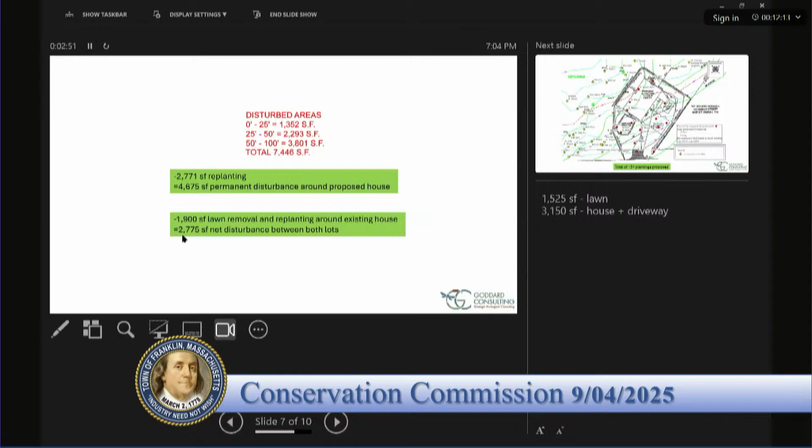We also inventory trees. We are fortunate that we don't have all that many mature trees to take down here. It's about 15. And again, 154 plantings proposed to offset those trees that'll be lost here. This graphic was just to illustrate the general direction of surface runoff here. Relatively flat site, a lot of vegetation for any stormwater runoff to get through. So we really don't think that there is much, if any, concern about runoff reaching the wetlands. And importantly, also infiltrating roof runoff here.

The roof runoff infiltration that we're providing can handle about a 1.4 inch rain event. And this is kind of a simplified calculation. It could hold about 1.4 inches of rain over the entire roof surface, essentially if all that rain fell at once. So in all likelihood, it's a little bit more than that.

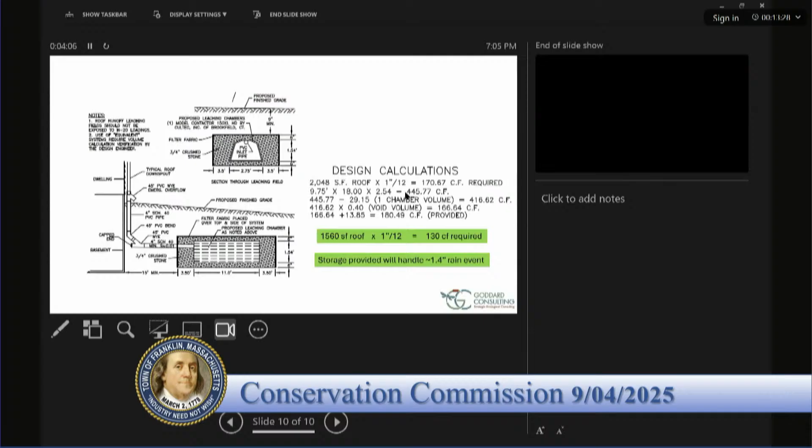I want to bring this back to the avoid, minimize, mitigate calculus that we've been talking about here. We've made some pretty significant changes since the first time that this came to you. We've avoided impacts to the wetland by implementing this retaining wall, which allows us to avoid grading and consequently stretching out into and closer to the wetland itself. We've eliminated the fill and replication scheme. Similarly, that allows us to avoid impacting natural buffer zone for the sake of creating a replication area.

We have minimized our impact, again, by shrinking the footprint of the house. We've relocated the driveway to be able to shrink the limit of work as a whole. And for those impacts that we can't avoid or minimize, we're providing a pretty substantial amount of mitigation here.

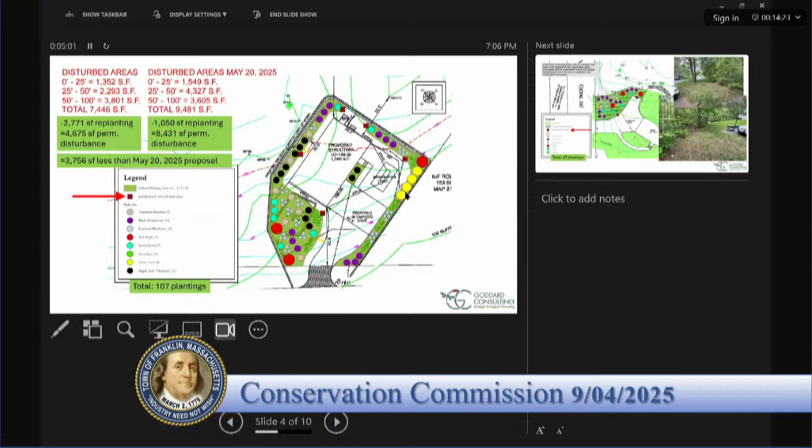Almost 2,800 square feet of planting around the proposed house, all native species, shrubs, trees, herbaceous, as well as about 1,900 square feet of lawn removal for mitigation around the existing house.

Also providing that stormwater management, which again is not required of single-family home projects, but we hope that you will consider all of these components as you're making a decision here, that we have avoided impacts as much as possible. We've minimized impacts where we can, and for everything that we can't avoid or minimize, we've provided a pretty substantial amount of mitigation, really pretty much everything that we could come up with to mitigate for those impacts.

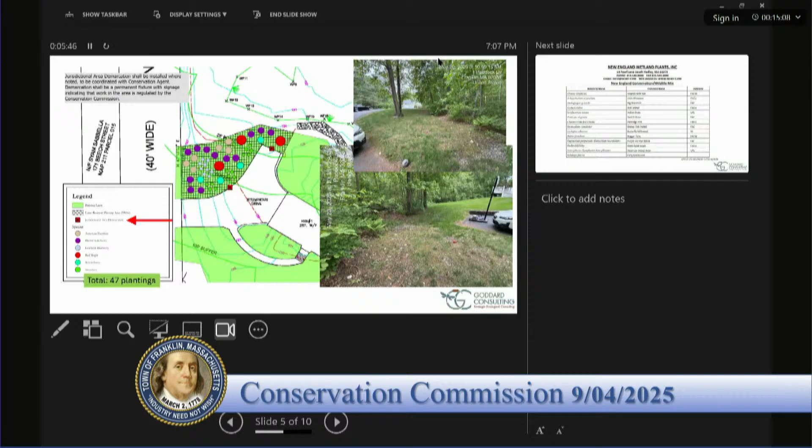So that is my piece here. If Paul or Nabi have anything to add in chambers, I would throw it to them. Thanks, Chris.

He said it all. You said it all. Thank you, Chris. That was great. It was. All right, well, appreciate the overview, Chris.

Any questions from any of the commissioners? Yeah, I do have one through the chair. Chris, on the last meeting, we had talked about putting boundary markers. Is that in the conditions or will be? We did, I did. Okay, fine.

So we can talk about that. And you put it on the plan. So okay, good, thank you. We did show those on our plans here, so they are on paper, and I'm sure that the chair has a condition to that effect as well. Yep. Thank you. Good question.

I appreciate you minimizing the impact of this. Absolutely. Yeah, I'd like to say that I think you've done as much as you can do for this very difficult site to make it work.

Any questions in the audience and chambers here? Comments? Anybody online? We do have a hand up. John Detterman, hello. Good evening.

I have a quick question. Chris, the document indicates that it was revised on August 26th. Forgive me if I missed your note of what was changed between the 14th and the 26th. I didn't see anything. So the only addition was those couple of boundary markers that we just mentioned. Otherwise, footprints, square footages, setbacks, distances, all those types of things are unchanged.

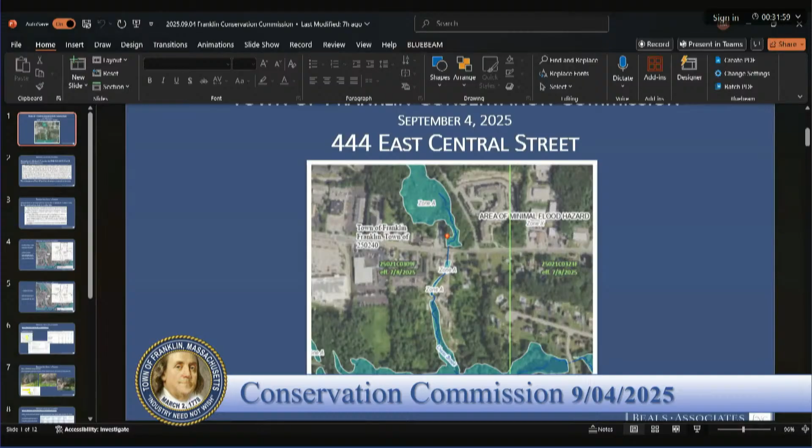As AJ mentioned, we were brought in mainly to look at one very specific and isolated area—the limits of bordering land subject to flooding based on the updated flood maps.

As you know, on July 8th of this year, new flood maps came out in a lot of areas throughout the Commonwealth. In some areas there were really no changes, in others very small changes. In areas such as this, they added additional coverage through there, and I think that's one of the sources of some of the prior meetings and discussions that went on.

The Massachusetts Wetlands Protection Act is very clear about how to define bordering land subject to flooding, and they actually did contemplate what happens in the event you have a site like this. The first way you define it is if they've already done some routing through there—if they've done calculations, if profiles have been established along a stream or around a lake, pond, or other water body—FEMA establishes an AE zone.

Those are zones that have an elevation assigned to them. Sometimes the elevations step up incrementally, especially in a riverine situation; other times they're just flat, stagnant for ponds, lakes, and larger water bodies. In some cases you have an A zone, which is what we have here on this site. That's where FEMA and the National Flood Insurance Program has not gone in and done any flood routing, looked at any calculations, analyzed culverts, blockages, and things like that.

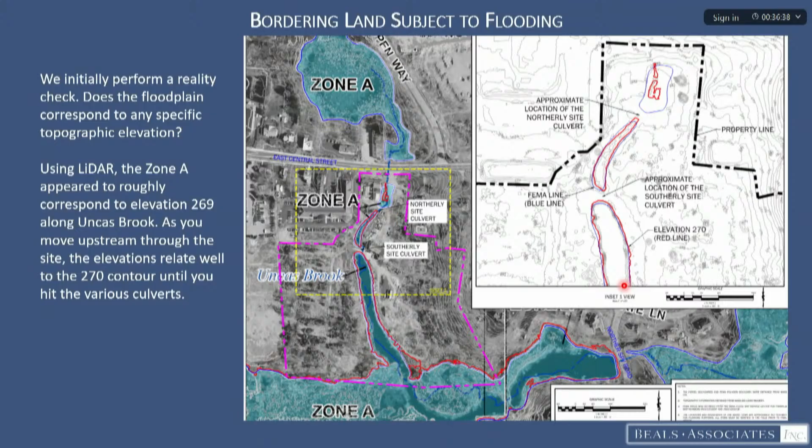It really doesn't correlate well to anything. So that shows us that you can't just rely on overlaying that and calling it a day and then establishing from there. So we have a couple of different ways that we can go about calculating this.

As I noted, we looked at 3 specific points as we went through this analysis. Northern Spy Road, which is really the downstream boundary of what our analysis was, off the project site, down to the lower left. I'll put the highlighter right on it. That laser point is right on it now.

And then there's 2 sets of site culverts that we looked at. We'll call them the southerly site culvert, which is located about here, and then a northerly site culvert, which is here. Those are culverts that are intended to stay, I believe, in the post-development condition.

Are they the same, is that one culvert each at that location? No, actually, in this location, the northern one, there's 2. The southern one, there's a single. There's one, okay.

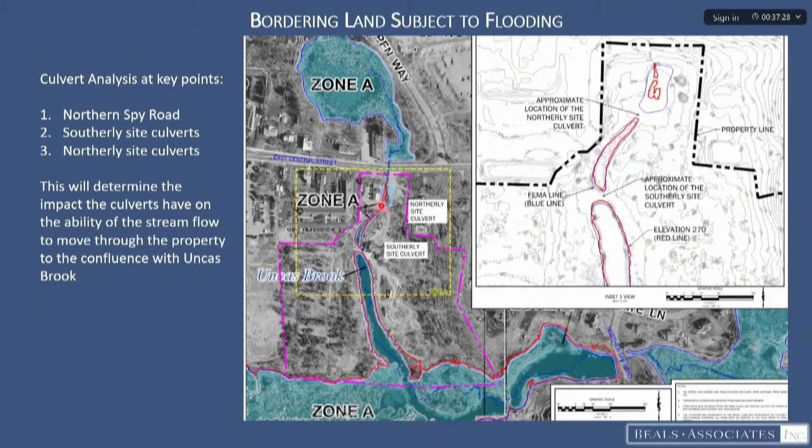So a couple of different ways you can determine this. You can go out and do a lot of field work and study the watershed for a long period of time.

Because a lot of this FEMA work gets done based on USGS programming, national NRCS mapping, and things like that, what we like to do is use a USGS program known as StreamStats. With StreamStats, as long as there's a defined flow path or stream channel, we can pick individual points along that, and it'll run an analysis for us.

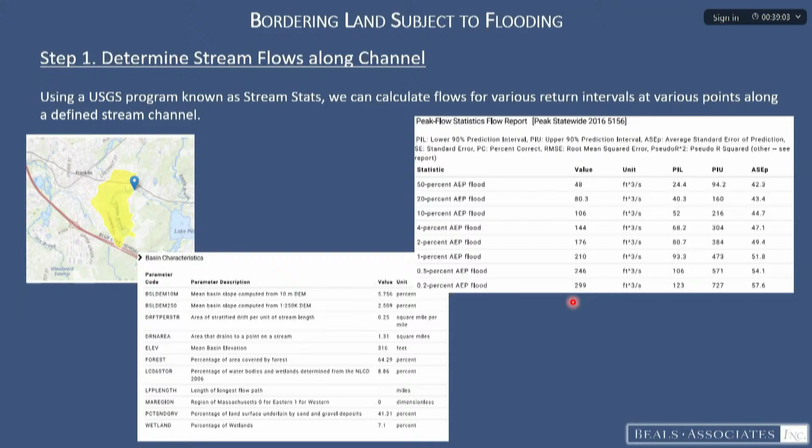And then we have to define our downstream boundary, which, as I said, is down at Northern Spy Road. Where that road crosses over Uncas Brook, on one side of the road, there's water. On the other side of the road, it was dry.

The guys that did the field work for me, I sent them out a week later, and I said, 'Are you sure that's dry?' They told me it was dry. They were in the area on another matter, so I had them take a photograph again. So August 12th, August 19th, August 27th, the downstream side of those culverts is dry. Upstream side, there's water right to the bottom of the culvert. So there's just nothing coming through it.

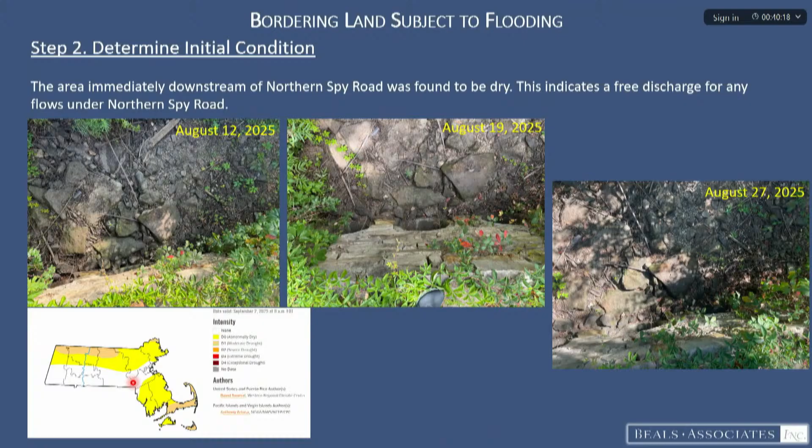The next thing we do is we start to run those flows that we calculated using StreamStats through a culvert analysis program. Federal Highway Administration has developed a program called HY8. It's fairly useful in running multiple storms through a culvert scenario because it can analyze quite a few things. Most importantly, it not only analyzes whether you have a headwater or tailwater control, but it also analyzes what happens if you overtop the road.

And if you put the roadway geometry or the crossing geometry in, it can also tell you the spread, and it takes that into account when it's figuring out its headwater elevations. So using a tailwater condition of free discharge based on the dry flows, we started running those through 2-year all the way up to the 500-year storm through that Northern Spy Road culvert.

271.17. I wanted to highlight that in this case because I know when the applicant's team was here presenting the ANRAD and subsequently issued the ORAD, one of the arguments that they made was that should be looked at as elevation 271 up to that area because of the overtopping on Northern Spy Road. Right. This kind of validates that. This calculation and that assumption vary by 2 inches. I think given the way all these things are done, 2 inches is a pretty good correlation.

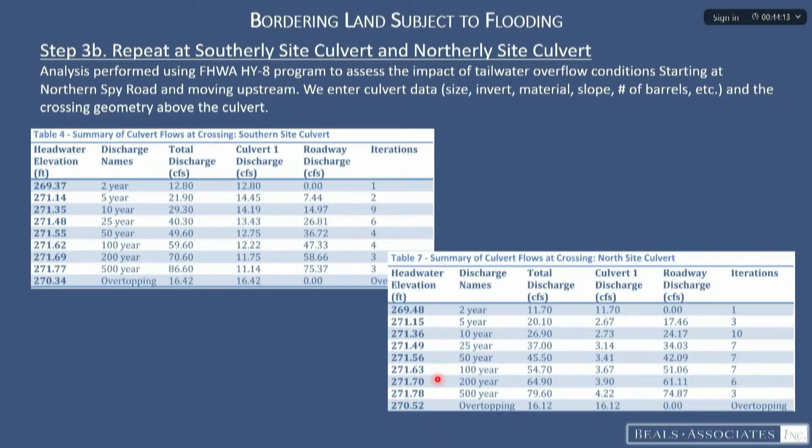Just to circle back to that overtopping where I said it was between the 2 and 5 year storm, 2-year storm, 3.37, 5-year storm, 4.38. So probably somewhere around 4 inches of rainfall in 24 hours is what overtopped that. The other two site culverts had roughly the same result. Somewhere in between that 2 and 5 year storm is where they overtopped as well. If you think about 4 inches of rain in 24 hours, it's a pretty good amount in an area where those culverts have probably been there for quite a while. So it passes the straight face test at this point.

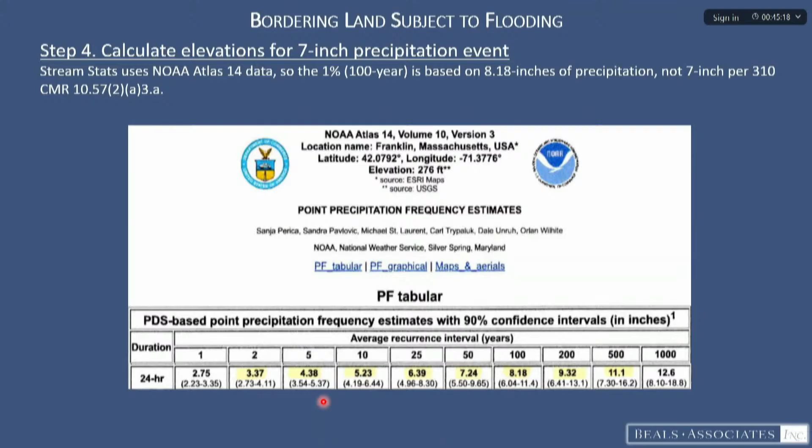So then what we did is we took the NOAA 14 precipitation right here. That's where the 7-inch rainfall comes in between that 25 and the 50. And we just prorated our results to get it to go back to the 7-inch storm. So Northern Spy Road, southerly site culvert, and northerly site culvert, if you look at those 3 points of analysis, we originally said 271.17, 271.62, 271.63. If we prorate it down for a 7-inch rainfall, we end up with 271.02, 271.53, and 271.54 for those 3 points of analysis.

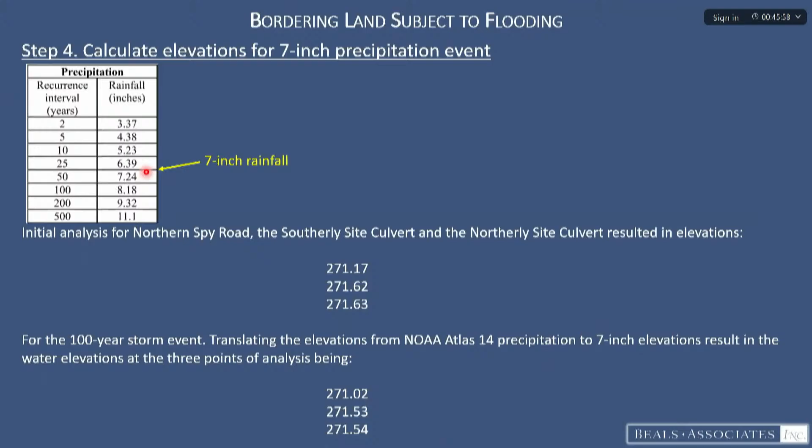So our recommendation back to the applicant and his team was that you call bordering land subject to flooding from the southerly culvert downstream 271.0, like they originally had come up with. In between the southerly and the northerly culvert should be 271.5, and in between the northerly culvert and East Central Street, 271.5 as well. And that's the overview of our analysis and how we got there.

Got it. Okay. Thanks for putting it together in that format. That was helpful, more than reading the report, so thank you. Yeah, if there's any more questions, I'm happy to. It looks a little better in this version than the report. The report's a little dry to read, but. Yeah.

So, you know, do you anticipate any resulting changes in stormwater management based on that? I'll leave that up to the applicant. Yeah, I guess that's not a question for you. Yeah, sorry. Yeah, we brought in Todd specifically to really hone down on identifying the base flood elevation. Got it. He's really versed in that.

So Carlton Quinn is online on Zoom. He's our civil engineer. He can speak to, at a high level, what modifications we're looking at in terms of the new base flood elevation for the BLSF. Carlton, thanks again. And if you can pull up a site plan, Carlton, just so the commission is able to see what area we're talking about, that would be helpful, I think. Yep, 1 second.

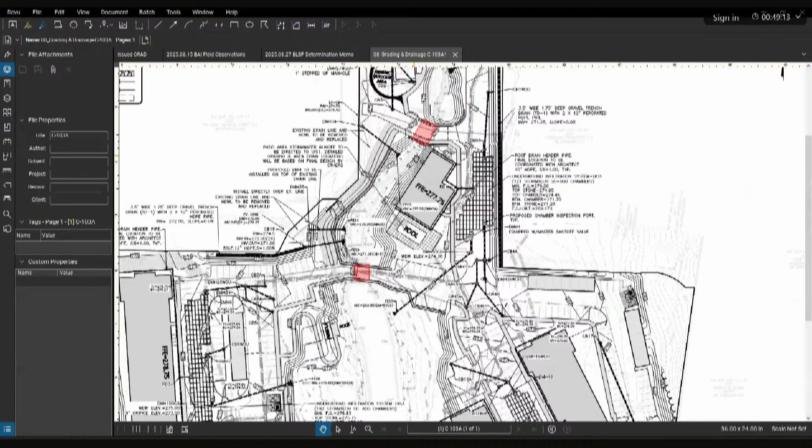Right. The one change to the stormwater design is that there's an existing culvert here that we're proposing to keep in place. And then the ground elevation right here is about 270.5 or so. At that point, the existing ground, we'll be putting in some proposed culverts at that elevation. So when the water ponds up to the floodplain, or the BLSF that Todd had calculated of 271.5, the water's allowed to then pitch into the next low point and not back up the system anymore because we're putting in the stream crossing. And the same thing over here.

So we're putting in some culverts right at about the floodplain elevation to allow the water to discharge as it does today and not have any effects of backing the water up any more than it is. So we'll be trying to match the existing conditions. But outside of those two things, we're not changing any other items on the stormwater.

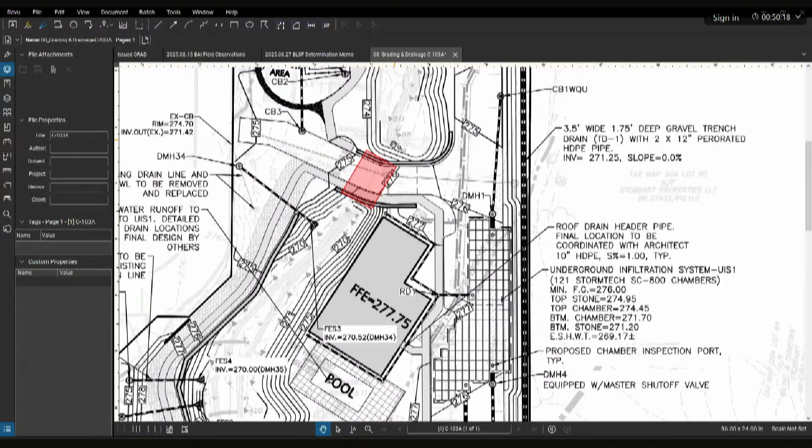So Carl, are you adding culverts to what's already there, or? Yeah, so the existing culvert's down about 268. We're keeping that as is. And then we're over the tops of the road at about 270.5. We'll be adding some culverts at that elevation, a little higher. Oh, I got it. Alongside them? Above them, right? Above them. Yeah. Okay. Do you know how many you're gonna add at each location, or not yet? I've estimated it's either 3 2x4 box culverts or 3 36-inch pipes in that neighborhood. All right. That's just a flow calculation. Got it.

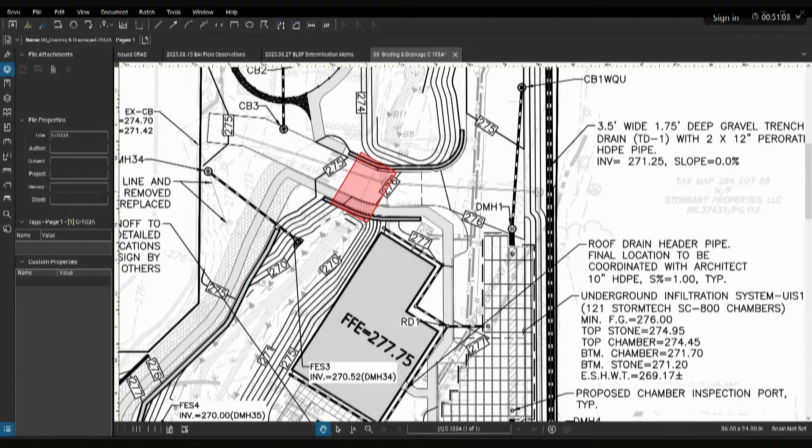You got a question? No, that was my question too, is like, given that we have existing culverts and it seems like you're almost reaching that elevation during the storms, that it would require a need to look at the current design on this, so I think Carlton's got it, he's already tracking that.

Yeah, when we had completed our analysis, Carlton and I had quite a few discussions back and forth. And one of the nice things that pops out of that analysis is not only does it give you those elevations, but it also gives you the amount of flow that's coming over the top in the various areas. So it really kind of makes his job a little bit easier, because now all he's got to do is design a culvert to accommodate that flow. So if we're saying it's 70 CFS that comes over that road, do a culvert that can accommodate 70 CFS, and he won't have any further impacts on that BLSF area.

And Carlton, could you walk the commission through the other modification that we're looking at? I think it's outside of the stormwater culvert design.

Which one is that? Sorry. Where the amenity area is in the north? Oh, yeah, so when we go through the BLSF calcs to match the volumes that are there currently, this area here will likely just become a mitigation area at about the floodplain elevation. So this area of amenities will most likely be removed for a grassed area that will be used for mitigation.

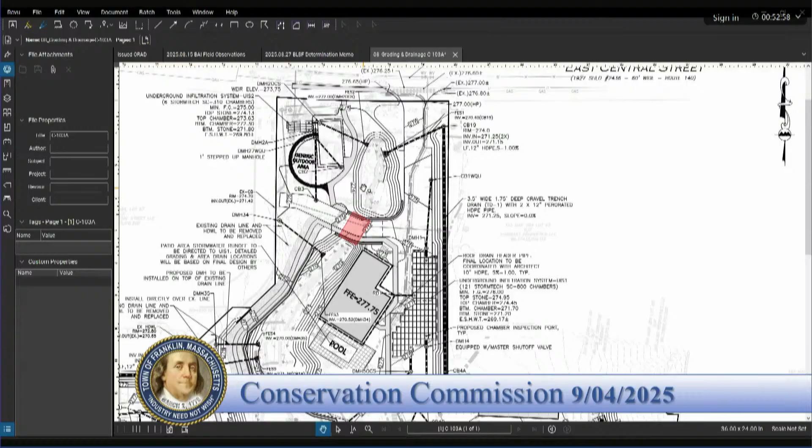There's no reason it can't be planted and look nice, but it'll all be brought down to kind of the 271 elevation to make sure that we have the same amount of flood volume as we currently have today. And what's planned there now? What's currently planned there now is a dog park and some sort of recreational court. We haven't completely solidified the program for that just yet.

Okay. So outdoor amenities. Okay, I mean, you think you're sticking with the dock, or? Yes, the dock is to the south. Oh, all right. Yep. So we'll look at relocating the dog park to another location, probably near that dock, or maybe on the other side to the east of the stream, and perhaps we might even do two small dog parks.

Oh, dog park. I thought you said dock park. Oh, no, dog. Sorry. All right, my bad. I'm like, wait a minute. All right, I got you. All right, that works.

Well, that was helpful to go through that. Yeah, explains it. So that solves the change that came about. You've given us the new analysis, and you're going to change the culverts to accommodate those additional flows, and we should be good. Correct. Do you have any other changes anticipated coming out of the ZBA or anything?

No, at this stage, we responded to some civil peer review comments last week or maybe the week prior. There were some minor changes that we need to still pick up in our plans. So we wrote a response letter indicating we would change the plans, but we wanted to wait until we were able to incorporate the changes that came about from the commission and from Beta's last letter before we updated the plans, so we didn't have to update twice.

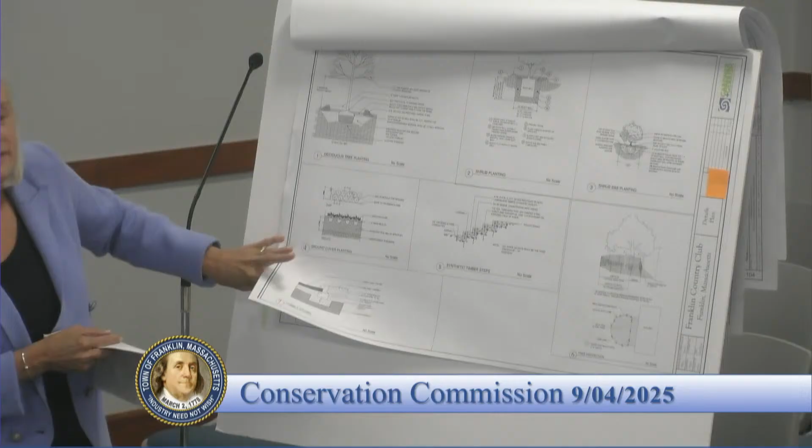There's a planting plan here that talks about how the shrubs will be planted, how the trees will be planted that are up close to the clubhouse. It's pretty standard. And then we've provided you with a construction phasing plan so that you understand what the intention is here. The first phase will be the lowering of this westerly tee box. Yep. And so there'll be erosion control, those same wattles and silt fence around that area to isolate that. That work will be done in a short period of time, probably 2 to 3 weeks. We'll sod that, and that will be the area that they use to play golf on while the clubhouse construction is happening and while this work is happening.

The next piece of work... Do you anticipate having to store any of the excavated material on site, or are you putting it right in a dump truck and getting it out of there, or do you know? Or are you putting it somewhere else? This material will probably go into the dump that they have, which is outside jurisdictional areas, but any asphalt that comes off from the asphalt replacement for the cart paths, that will immediately go into trucks. You're not storing it there in the jurisdictional area? No, we're not storing anything.

Okay, great. And just to get it said now, for the construction, we're not keeping equipment stored overnight in the jurisdictional areas. We have a maintenance facility that's kind of located here. They fuel there. Vehicles will go in that area. Yeah, true. So there'll be no refueling and no storage of equipment here. Okay. So we'll do that one piece. The erosion control has been set. It looks a little funny because it's around the old cart paths, not the new cart paths that are shown on here.

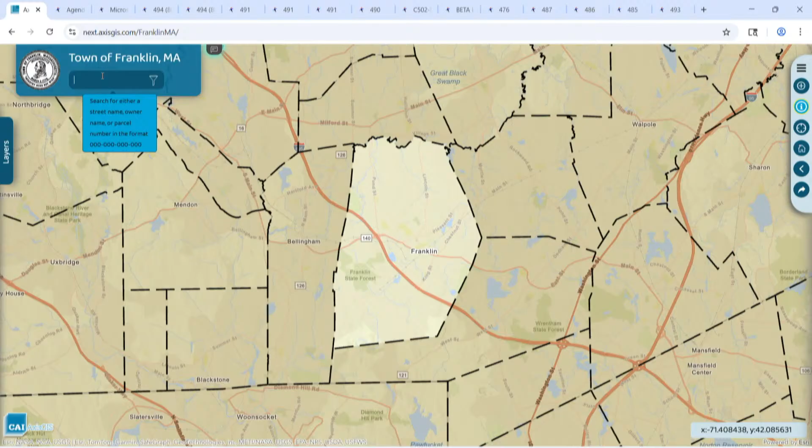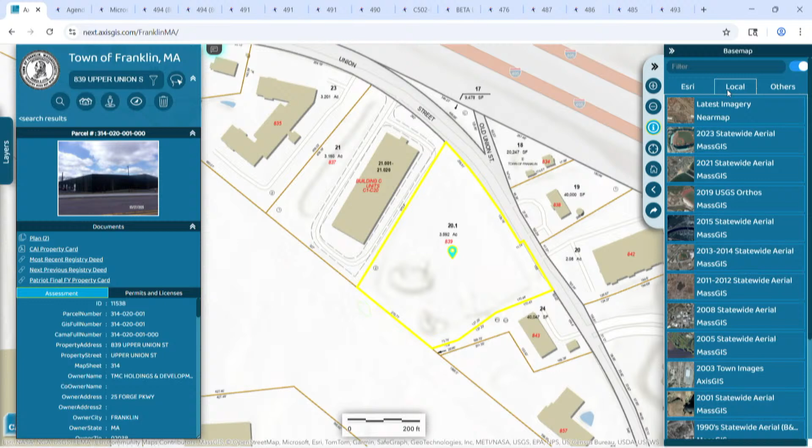Yeah, Mark, this is John. I think barring that topic, based on our notes, everything else should be buttoned up and good to go at the site. Okay, looks like we had a couple plants that died or were dying. I don't know if you had any opportunity to replace those? Yeah, the landscaper's actively working on, once the weather settles down, upgrading some of the planting, so it's a work in progress, but I think we established the initial required plantings, and it's an ongoing maintenance issue at this point. Okay. So the concrete's not yours, the planting refurbishment's underway, so I think we're good. John says it's all right.

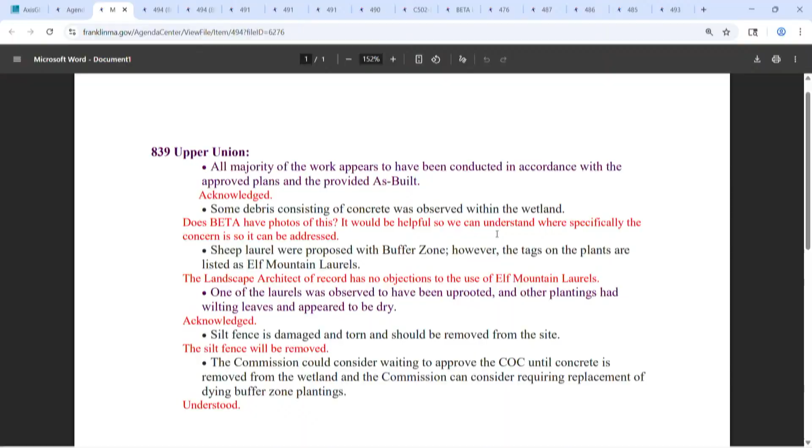Louis, is it you? Yes, no, I'll do it again. I'll do it. Pretty sure it's me. Pretty sure it's you. All right, Roger, give us that. Try to keep track.

I'll make a motion to approve the COC for 839 Upper Union Street. Second that, all right. Vote to approve. Vote to approve. Approve. All right, you're all set. Thanks for coming in and talking it through. I know it's late, you sat through a lot, but we appreciate it. No problem, thank you again. Bye-bye.

Now we've got 84 Populatic. All right, I'm ready. Sorry about that. And thank you for doing more pictures, and I know we had some from Beta out there, and things are actually looking pretty good, right? Yeah, I'm very excited about the growth, and we had someone from another company too that we're looking to do more work with and get more plantings. And actually, when they came out, we were talking about all the potential plantings and everything.

Sorry, something just popped up on my thing. Am I staying as an attendee, or do I join as a panelist? If you had anything to share your screen for, that would be the panelist option. You don't need it otherwise. Okay, sorry. Yeah, go ahead.

So I was just saying, the plantings that we're looking forward to doing, to stabilize more of the slope, keep the natives growing, and get rid of some of the poison ivy and the invasives that are there, rather than me just hand picking it all for now.

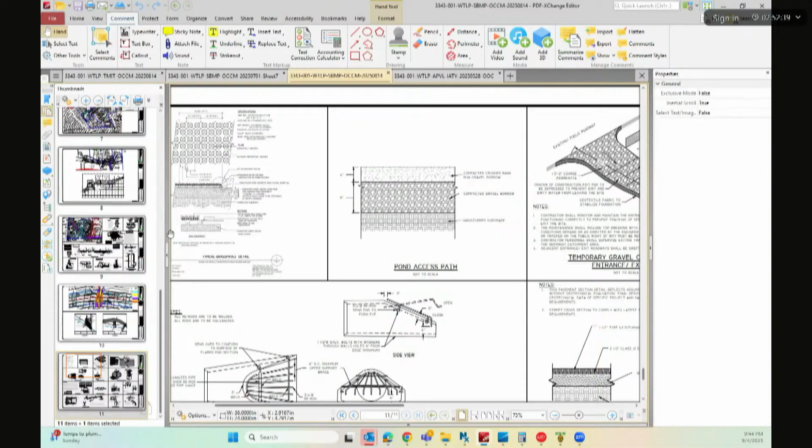So we show that as well, and then in addition, we've updated the bank areas, which was another aspect to the order of conditions, permanent access impact to land underwater, and we show some bank impacts here on the sectional figure for the river crossing.

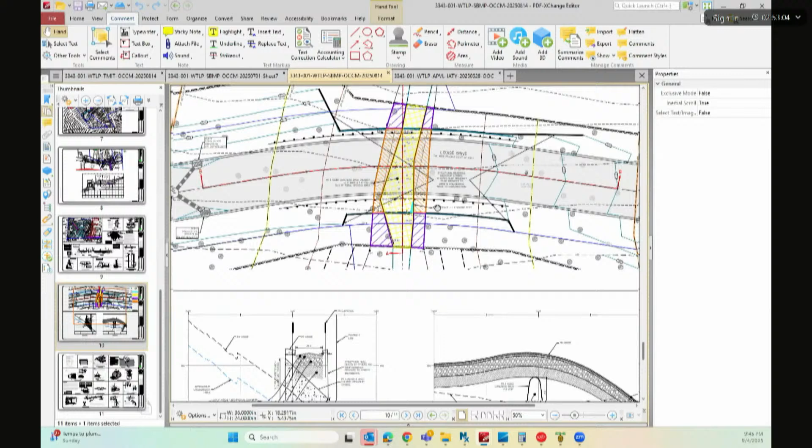So we have several different plan updates we made, and I know that Beta hasn't finished their review. So what I may suggest in advance of the next hearing is that next week we'll submit just a summary letter saying we've met conditions, this and this, just so we can check off the boxes and proceed. We're gearing up for a pre-construction meeting, which we'd like to set up in the near future, to get going on the work. And as another update on the site, we have flagged and staked the limit of disturbance in the field as well as the center line of road.

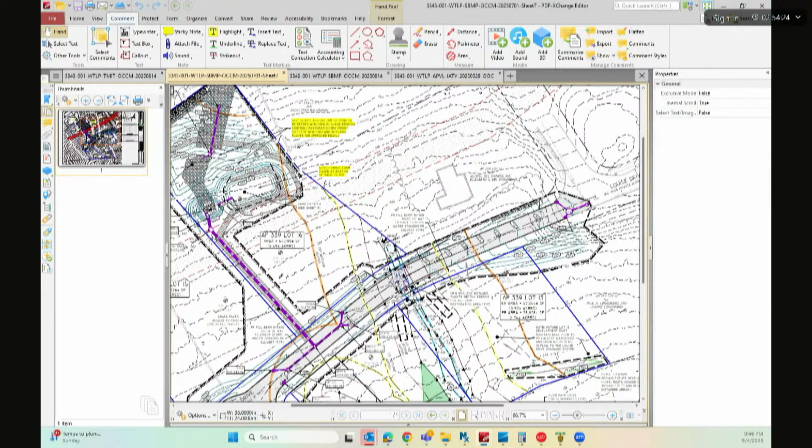So that's all set for review and for the contractor to begin setting the soil erosion controls and emergency snow fence, as we established during the initial hearing. So that's basically an update from my end, and I welcome any questions, comments, or if the procedure to submit a letter in advance of the next hearing sounds appropriate. Yeah, I think you did a good job addressing the comments, so thank you. And if you could get that by next Thursday, that would really be helpful. So what's next?

Okay, so Beta's going to check off on it. He's going to give us a summary, and then we would vote on whether to approve.

Yeah, because it's a COC, right? Or it's adherence to the order of conditions for this plan. I don't recall off the top of my head what condition number it was. 159, 113. Yeah, so we're just making sure we dot all the i's, cross all the t's. Next time we could potentially vote to approve the COC if the information's correct. Okay, so do we have John online if there was anything I wanted to cover right now.

Yeah, I think they'll take a look at it and we'll get feedback and get that summary letter, and I think that'll be good. Yeah Mark, this is John, that letter would be very helpful. Just a reminder to the commission, the purpose of this exercise is basically some requirements that the applicant has to address as part of their order before they go to construction. So if they can submit that letter, make sure everything is addressed, we can take a look and then get the pre-con scheduled and get them breaking ground.